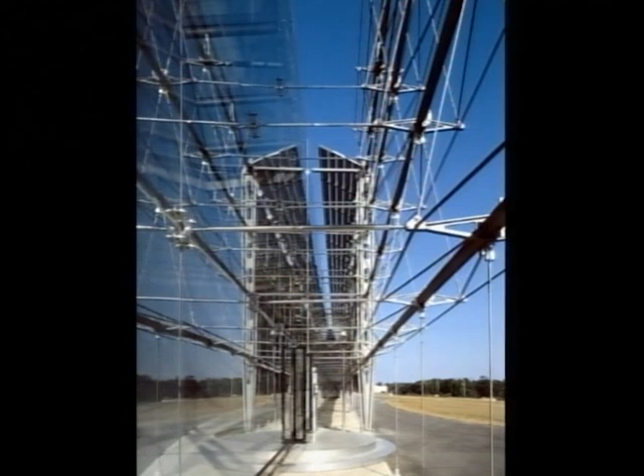At the same time, we created a sort of transition, because this structure is very thin, very little, even if it has 12 meter beams, but it's suspended from the big beams on top with cables to make it horizontal, to stabilize it horizontally.

It's just connected to the glass facade, which is a suspended glass facade, one of the first suspended glass facades, to avoid displacement of the glass facade from the wind.

So this gallery is a transition between the countryside and the office places. But because we wanted people coming from the countryside to not just immediately reach their desk, that's impossible, so you have to have a sort of time of transition.

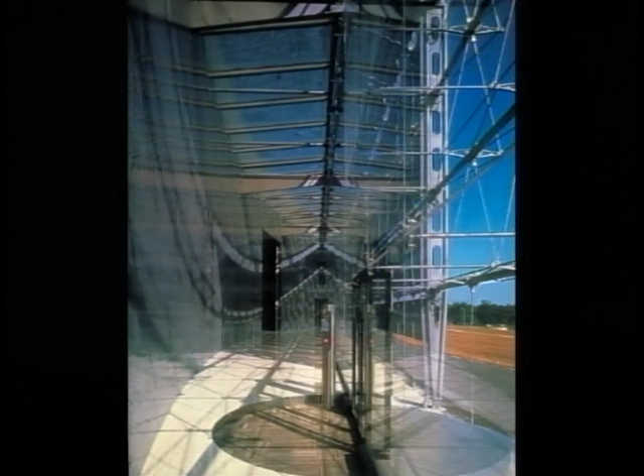And we did a hall, and this hall is not very big. It's only 100 square meters, but it's 50 meters long. And its back wall is a curved wall, from 0 to 4 meters in the middle and back to 0 at the end.

We organized to have the door entrance at one extremity and the door to cross the wall to go to the offices at the other extremity. So when you come into the building, you just open the door, facing the wall.

So you have to turn your body, discover the space, and start to walk. When a visitor comes for the first time into the building, they do just as I described. This is a dynamic space.

For me, it's a dynamic space. It's a space which makes people walk inside, because first they stop, and after they look at it, and after that they walk.

And you go to the end, to this door, to this hole inside the wall, to enter inside the offices building. So this is a sort of outside-inside journey, going to the door at the end.

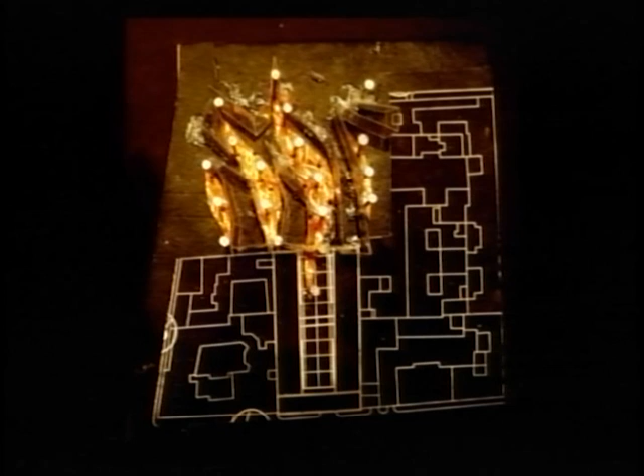Usually we start to work by models. We started by making a little model of the site, and we began by understanding the brief, understanding what it is, how we can deal with this site, how we can deal with the program, how we can deal with the conditions of Rome and this historical city. We start by putting objects on the model of the site to get my mind working, to understand what we can do. So we made a lot of little models like that, like that, like that. This is never the final project, it's just the beginning, just to start making your mind work like that.

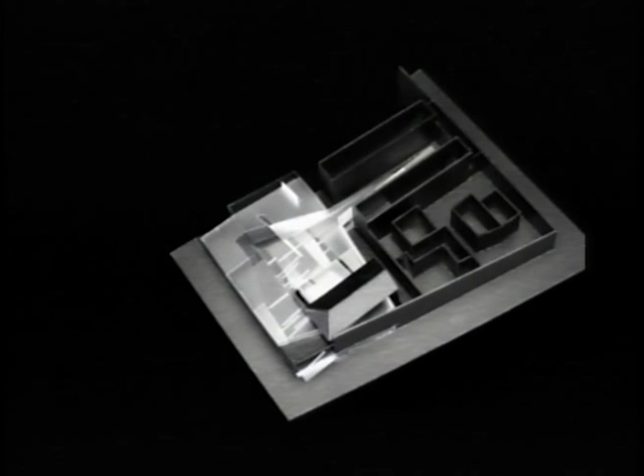And at the end, we arrived at that model for the first phase of the competition. The first decision was to fill the site, to cover all of it, and to have the possibility to keep the facade, because we were asked to keep the facades on both streets, here and here, but we could open the corner to create a new entrance. Between the entrance here on Via Reggio Emilia and the new entrance on Via Nizza, we have 4.5 meters of difference.

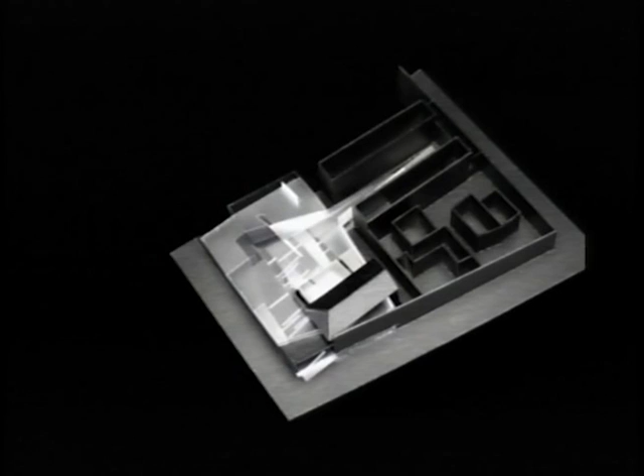So we decided to dig into the ground to create the high volume, because in some parts of the exhibition rooms they asked for 11 meters height. We didn't have that on the site, except by going up above the walls, but I didn't want to go above the facade, because I was thinking, my God, it's Rome, it's really protected and really preserved. If we build something like a tower above, or a building that goes above the walls, we would be pushed out. So I wanted to stay quietly behind the walls, and say, okay, I don't love staying behind the walls, but I keep them, and after that I create a new world.

So it was, again, a sort of strategy. By filling the site, even though they asked us to keep a little garden on the site, we decided to create a sort of hall, not yet shown in this model, to have a little garden after passing under this corner, and to fill that space by creating a sort of roof, a roof that could become something else.

At the first phase, it was like that. After that, I came to the site, because I hadn't come to the site before, having won the first phase and being selected. I know I had to have gone, but I never came, so sometimes you work only on the papers. Because it's open, it's not paid, so you have to do that much more economically.

After that, we started to develop. For the second phase, we started to develop the auditorium, the passerelles, etc., playing with the passerelle to organize the space and to organize the walkway everywhere, how to travel the space. And we came to this project.

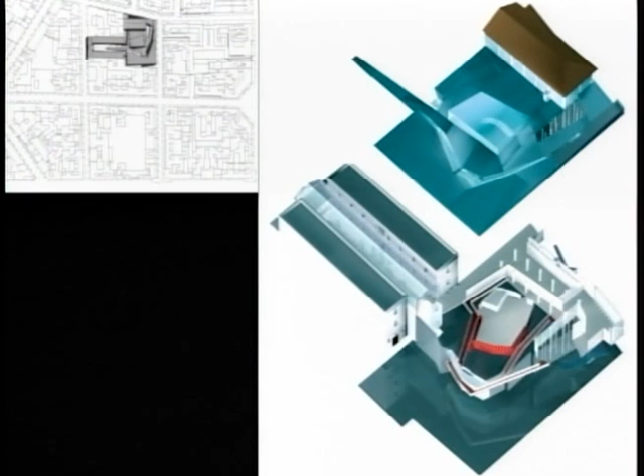And because we are in Rome, for the roof, we said okay, we do a terrace, a public square connected to the city, but at the same time in Rome we need a fountain in the middle, and we need the restaurant in front of the fountain. So we created this volume of glass with water running on it. Sometimes it runs, sometimes it doesn't. At the moment it's quite complicated, still complicated. And the restaurant is established in this old structure, open to the terrace in front of the fountain, as everywhere in Rome.

So finally, this terrace used by the museum was the reference - if I continue like that I'll speak always only on the MACRO. But because I wasn't really familiar with Rome, I remembered that in movies from the 70s, with Sophia Loren and Mastroianni talking on terraces of buildings, on balconies everywhere in Rome - that means the terraces at the top of buildings are used by people as a place for living. So that's why we made this terrace public, because we're not in a private building, and at the same time it became a square for the city.

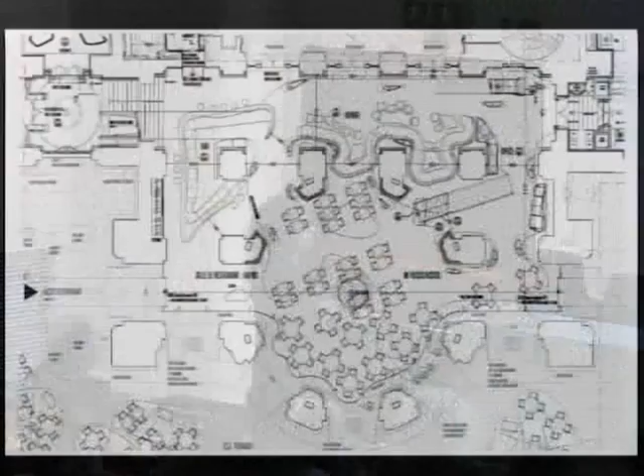And I had to create a second floor inside. So I decided to continue turning and create sinuous lines, to create a mezzanine without touching the walls, turning around the columns, creating a hall, with a staircase in the middle held by two columns without touching them. So everything avoids touching the walls and the cupola.

And this line was negotiated with the Ministry of Culture, with the commission for historical monuments, because they wanted me to keep the center of the cupola visible from below, so that when you enter the restaurant you know you are under a cupola. At the beginning I had this line coming much closer to the facade, and the position of this line was negotiated twice.

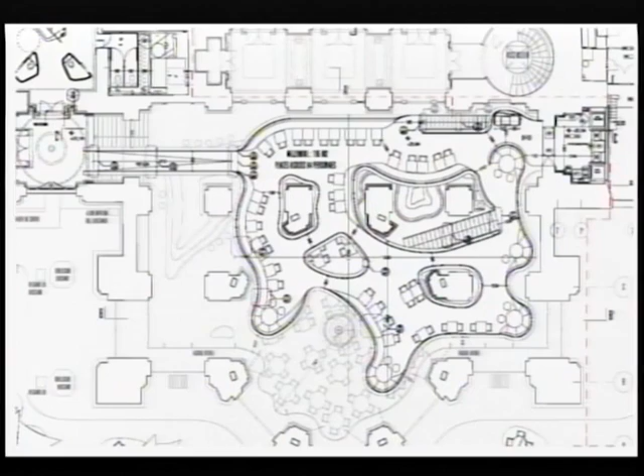So in a way, I didn't design that at the beginning, it's a result of negotiation. But by doing that, we created these balconies, which are very particular inside the restaurant. We passed the National Committee for Historical Monuments, and we had a unanimous vote. They said it's an exemplary project. Oh my God, I became an exemplary architect working in a historical monument. It was not what I was thinking before.

But sometimes history happens that way. The only place where we have a frame is at the door entrances, because the entrances are flat and we have to make them stable, so we need a frame. But it's not touching the walls or the columns, just fitted here and there in between the joints in the stones.

And everywhere else, you see the curved walls, the curved glass sheets, coming up directly to 6 meters high, which is the level of the cornice on the pylons, and going up to the cupola, without anchoring anything into the stone, just a silicone joint at the top, because the glass facade is auto-stable.

And inside, the mezzanine is a steel structure with molded plaster that we shaped around the columns, and we pushed back all the columns close to the other columns to keep the space as open and free as possible, as the cupola was before. And we covered that with plaster, keeping it as thin as possible to have a mineral aspect, like the stones.

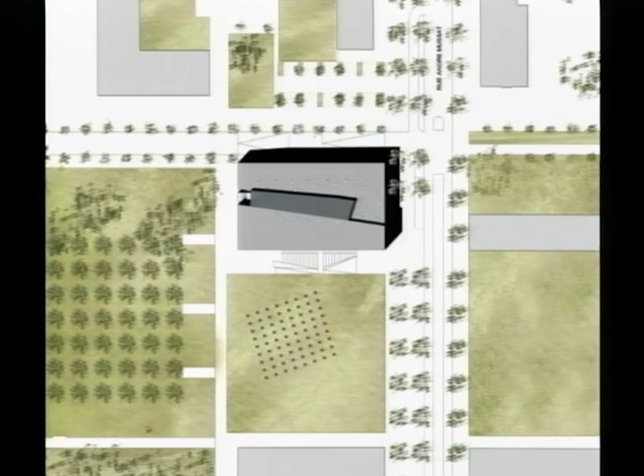We just opened in July the new museum in Rennes for contemporary art. It's in France with a very normal regulation for urban planning, where an architect decides that you have to build on a rectangle, and because you have a certain height to fulfill, at the end you have to build a parallelepiped. So it's a bit sad, but you have to build a parallelepiped.

Because when you fill the brief inside the volume dedicated to the space, you discover that you have no possibility other than doing a parallelepiped. So I was a bit disappointed when I discovered that I have to build a parallelepiped.

So I decided, okay, I built a parallelepiped, but I cut it. I cut it directly with this oblique line from the top to the level below, to the storage, to have a big vertical space 30 meters high from below to the top, where we can, with this narrow, very long space, describe a journey inside the building.

And she said - she knew that the museum would come close to her piece - she said, okay, the museum has to have a silencious facade in front of my piece, because my piece was there before, and you can't light your facade because you can't light my piece.

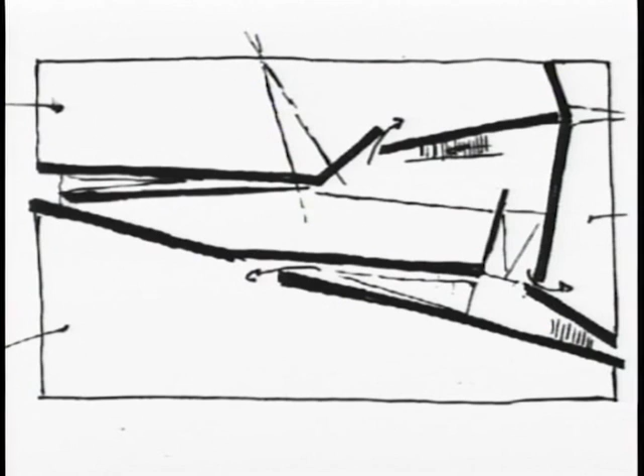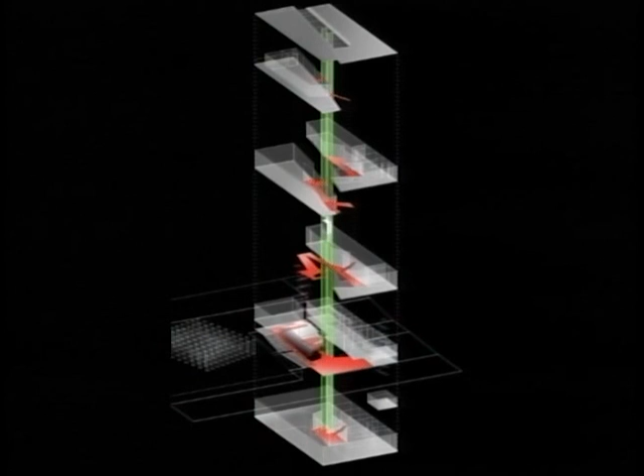And some sketching to try to create the space in the middle by pushing the space to open it up. And having this vertical promenade with the lift, which is a lift for the art pieces and also for people, and the promenade in the middle with ramps and different levels on both sides to create a sort of journey through the building, and a silencious facade, totally black.

But it's not total black. This time the black is outside. So this is the line, which is exactly at the same height as the stones. Here it's stainless steel black with three different blacks, but you don't see it because it depends on the lighting of the sky, and it changes colors all the time.

And this is glass, but every row has a different composition of glass. So it goes from a very opaque, total opaque black to a gray transparent. But from outside, you don't see that during the day. During the day, the facade is perceived as black. But at night, it's something else.

And because it was in the regulation, we had to create this floor set a bit back and have a cover. So we decided to have a flying roof above and to have the glass facade again for the offices on the top.

And this volume is the main exhibition room, 50 meters long and 500 square meters. This is in cantilever above this space, which is a public space, and it's supported by this concrete block, black concrete, which changes color depending on the humidity or not. And the entrance is here, so you don't see anything. From outside, it's a silencious block, a monolith black, as the artist asked.

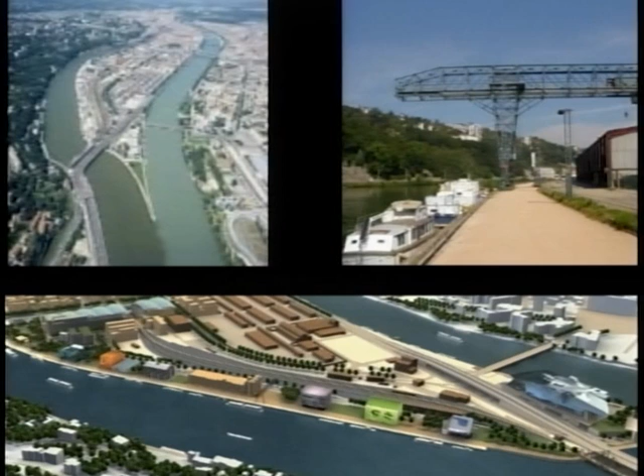We are building at the moment an offices building in Lyon for the headquarters of a big company. This is on Confluence. Confluence is a place in between where the river Rhône and the river Saône connect, and it was the industrial harbor before. The industrial harbor has left, and now they are developing a new area close to the city center, which is here.

And a company which owns this quay, the national company in charge of the rivers, is the owner of the building from the sugar, the building from the customs, and the building from the salt.

And they decided to renovate these buildings and create new buildings. So they did a competition without a program, and I won this one. And just at the end, which is opposite the Confluence Museum, under construction too, we are now building it.

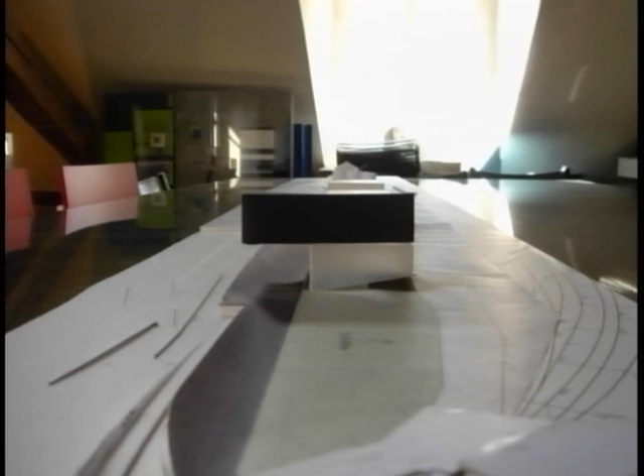So again, my site was a parallelepiped, and I had to build a parallelepiped. I said, okay, I don't want to do it, so this time I didn't cut it. I just twisted the upper part in cantilever toward the river bank, to have a glass box, transparent below with 2 levels, and 4 levels a bit darker above in cantilever.

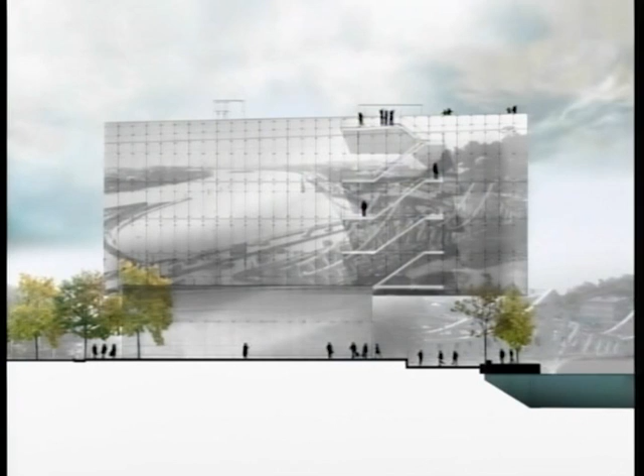So we were asked to work with an artist during the competition, and I worked with Felice Varini, who is a Swiss artist living in Paris. He works on the question of perspectives and points of view. I told him, you can play with my facade, do what you want with it, you can disturb it, change the perception of it. He said, Odile, you never give an order to an artist, I do what I want. I said, okay, do what you want.

So he said, okay, architects are arrogant, and architecture erases the landscape behind it. So I want to rebuild the landscape on your building. But because this is a building, I will take a picture from the top of the building in the 4 directions, and I will reapply on the facade the landscape which is behind, but in black and white.

So we are coming from the north, going to the end of the peninsula, and you see the end of the peninsula, you see the bridge just here. So the landscape is rebuilt on the facade, on the glass facade, in the 4 directions.

But for doing this huge cantilever, which is 25 meters above the river bank, and 4 levels, we had to build a very huge structure. Because we were an industrial harbor, we had these huge cranes and this huge bridge to transfer the goods from the river to the bank. So we built as for these objects.

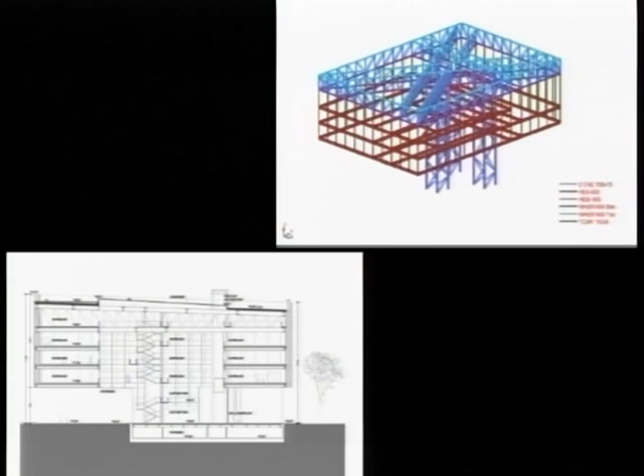That means we built 3 huge pylons inside an atrium to support huge crossing beams in the middle and one on the others, and beams all over the 4th floor, with suspension tubes, very tiny little tubes, to support and hang the floors below.

The space is open, with only some offices enclosed, with the atrium in the middle. You look at these huge columns. One has a staircase, one has a lift, and the other one has 2 lifts. And this is the placement of the facade below.

So that means here we are in the atrium with a roof floor, and you see the bank of the river down below. But when you walk on the river bank, you see through the building too. And this is in cantilever.

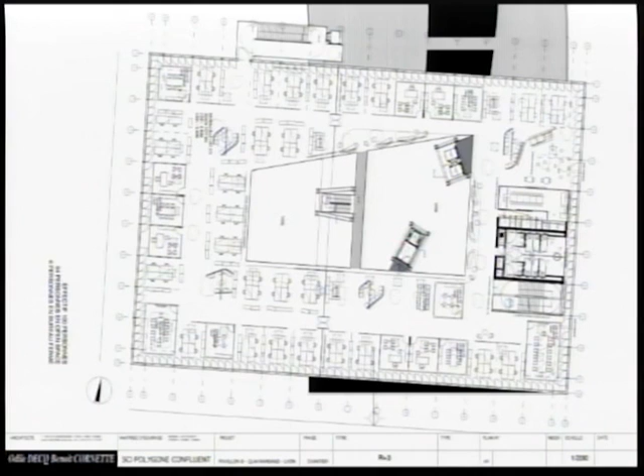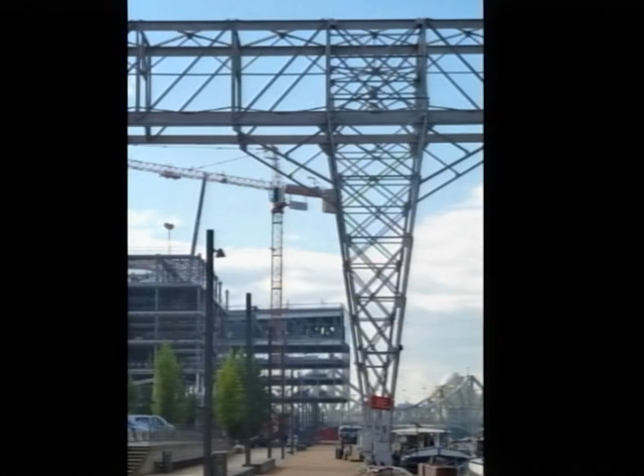So it was 3 or 4 weeks ago, because now the facade is starting. You see these huge objects that we had, that they kept on the side. So my building is going up to the river.

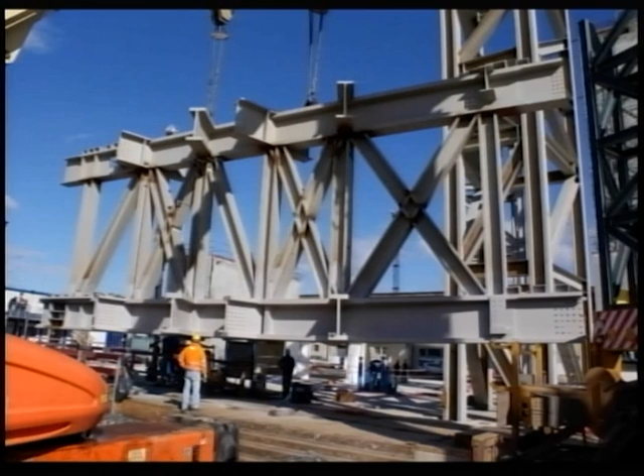So, huge beams. This is 4.5 meters. If you see this man, look at this man and look at this height. This is the 4th floor, in the middle of the 4th floor. And now, for me, it seems very little, but it's huge.

So you see the facade starting to hang on the structure. And inside, the atrium is 28 meters high to the rooftop.

And inside, the client decided that everything has to be transparent. So when we have enclosed offices, we have to have transparent glass partitions. We decided to keep the false floor, because we need that for the cables and connections, but to avoid the false ceiling, using the concrete ceiling slab above to have the warmth of the day coming into the floor, and to refresh it during the night.

But because of that, we have problems of acoustics and lighting, because usually we use the false ceiling for that. So we created with Luceplan new lamps, which are acoustic and lighting at the same time, which we call petals, floating above the office desks.

And they are developed now by Luceplan. Sometimes you have a cafeteria and some offices, and the toilets will be red this time, all red. And the lamps that we developed with Luceplan, and the prototype in their offices.

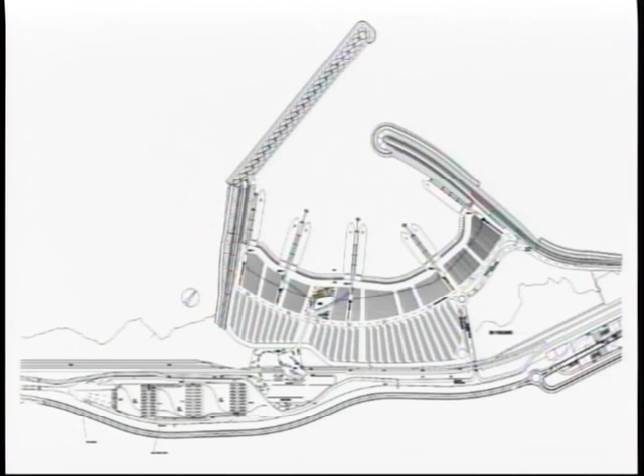At the same time, it's a place where a lot of Africans, Moroccans and others want to cross the Mediterranean, the Strait here, because it's just in front of Gibraltar—only 30 kilometers—and they want to cross to Europe. So we have a lot of safety and security problems. This is a very big condition problem.

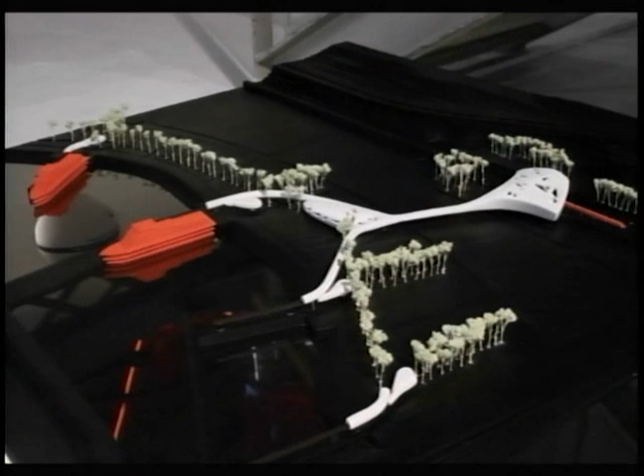So we decided to design this passenger terminal like a sort of animal anchored to the site, with tentacles going to the sea, and to have the waiting room a little closer to the sea, because sometimes when the sea isn't good, you have to wait for hours before crossing. So we had to provide comfortable conditions for people.

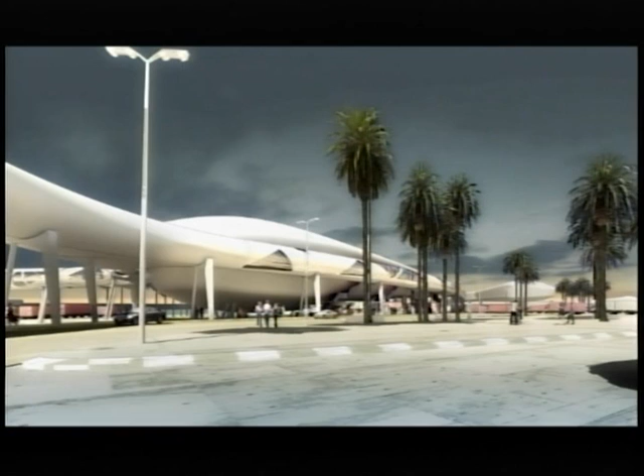Even for those waiting in their cars, that's why we lifted up the lounge. This is the terminal interior, and the lounge. The lounge is like a well, lifted above the ground, with the ground dug underneath to provide shadow for people staying in their cars, so they can go up, find toilets, find drinks, etc.—a little comfort on this surface, sometimes in hot weather.

For the moment we're waiting, because they had problems during the economic crisis in 2009. I'm not sure it will finally be built, because in Morocco you never know. In Italy you never know, but in Morocco it's worse.

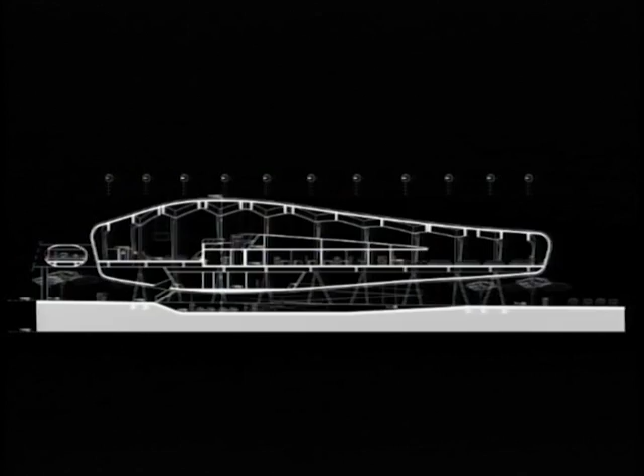In Italy you don't build. When you win, you don't build usually. I was very lucky with my museum. Everybody told me that, so I know that I'm lucky, but not in China.

So this year we won a new museum. It's in Nanjing, where they discovered some years ago one of the oldest bones of humanity, in a cave, in a mountain, at 1 hour of driving from Nanjing. So they decided to develop that as a huge site for this history of humanity, and to build a museum. They did a competition and I won it.

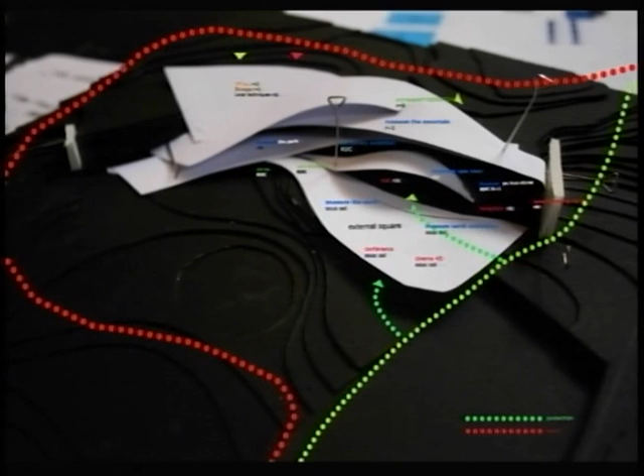We decided, because the site is interesting, that we had to play with the lines of the site. Because these caves were inside the mountains, we decided to play with the mountains and develop the building from them. So we played with the lines of the mountains and the site, lifting, digging, and transforming them, developing surfaces in between these lines, and developing paper models, and after that defining precisely the curved line from the mountains to the museum.

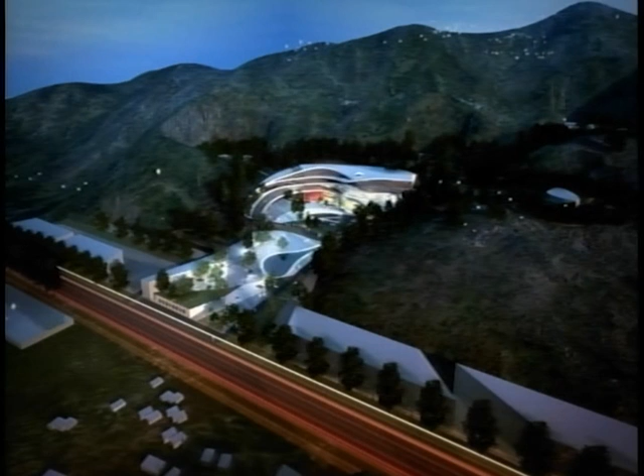Because it's not only a museum - there is a pavilion, an entrance pavilion, there are some shops everywhere, there's a huge car park. They will have some sites around for explaining different things, and hotels, etc. At the end it's very commercial, but also very cultural.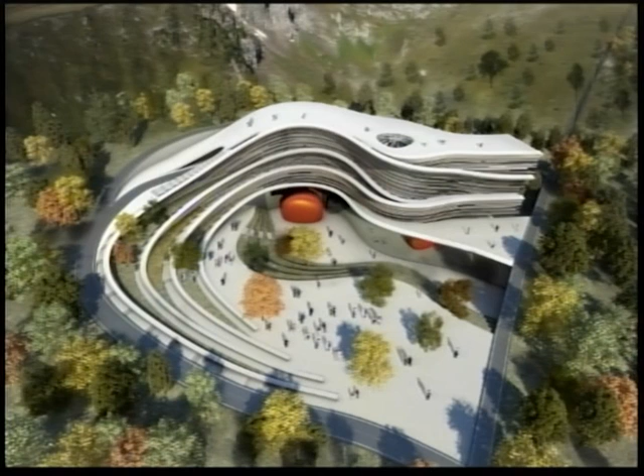So this is one of the more recent images that we developed, because we are at the phase where they will start to dig in January - we won in February this year. They will dig next year, because they want the building for 2014. So it's another way of perceiving time in China.

And because we are in the mountains, I wanted to build it with the curve, as I said. They said they don't want a total glass facade, so we proposed a sort of screen with stones in front of the glass facade, to give people the possibility to travel everywhere outside and inside in the same ways.

But there is a main vertical circulation in that place, and these two levels - this high level of ground floor and the mezzanine - are for commercial use.

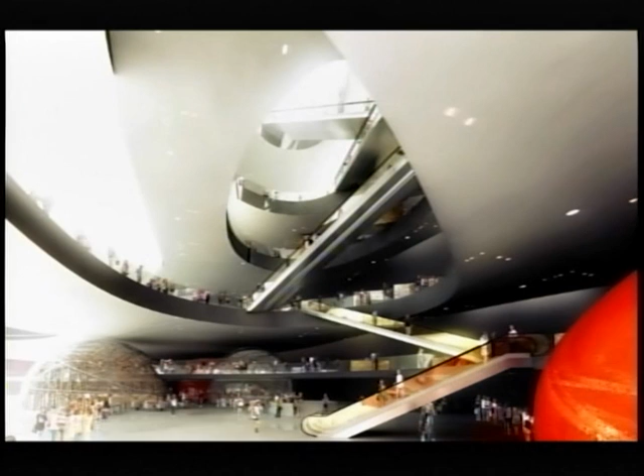With millions of people expected to come inside this museum, we need escalators - we can't have only staircases and ramps, it's not enough. So we played with the escalators, and with the holes of this atrium, the vertical hole, displacing it on every level, to play with how people travel the space and discover it on both sides in different manners, and sometimes by staircase.

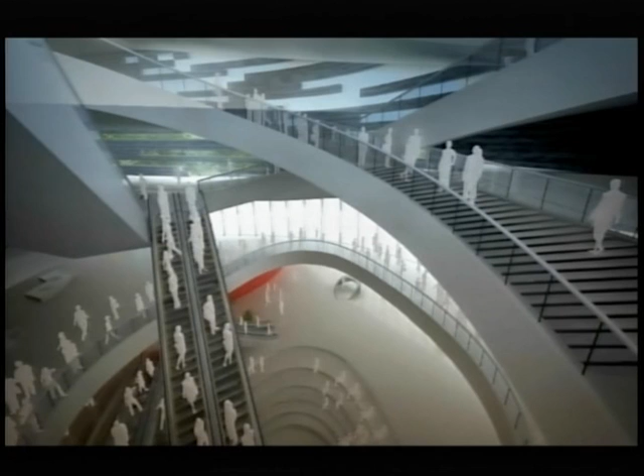For the exhibition, we proposed some exhibition sets for the different exhibitions they needed. But finally they decided to appoint an American company for doing that, so I will start to discuss with them next month.

Some years ago we did a building in Shanghai, a very little one, and a client asked me to come to a jury in the center of China for a tower. I answered yes, and as soon as I did, they asked, do you want to come with a project? I said yes, but for what? They said for a pavilion. I said yes, but can you send me the site? They sent me an A0 sheet of paper, white, nothing on it except a little blue pond somewhere, and said, this is your site.

I said, okay, but what is this sheet for? This is for developing project buildings for exhibiting furniture. Okay, 4 hectares, and I have the little pond in the middle for a 1,500 square meter building, so a very little one. So I came there.

I arrived with one project, because it was only 2 weeks later. I said, okay, I propose you that. They asked, do you have others? I said no, I came with only one. They said, okay, we will build it. So I was only allowed to come 3 times. I knew beforehand about that condition, that I couldn't come so often and they wouldn't pay for my travels, so I had to do something a little bit simple but complex.

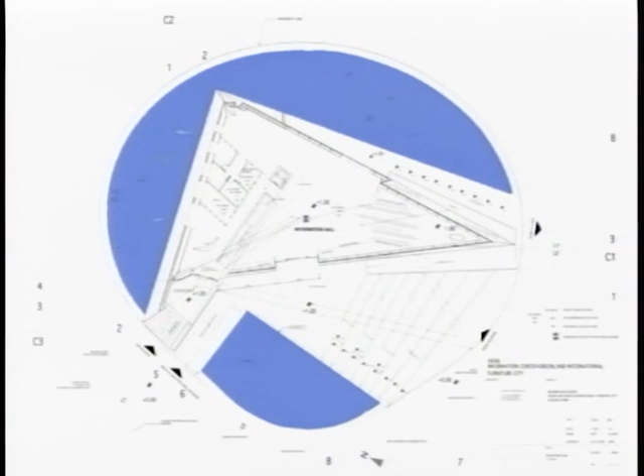So I proposed on my pond to build a sort of pyramid pavilion, because my pond was not large enough. It was not 1,500 square meters, much less than that. So I had to go down and to go up. I could have gone to 20 meters high. So I decided to do this and propose that building.

And I went 3 times, 1 week each, discussing with the engineers and the architects, exchanging a lot by emails, coming there to go to the supermarket of materials, huge, enormous, a huge site of supermarkets choosing the materials, choosing the floors, choosing the materials of the facade, the glass, etc., in huge supermarkets or shopping malls of materials.

And at the end, they sent me the pictures. It was 14 months later, after my first email, and it was exactly what I designed. So it's possible, not always, but this one. But the structure was a bit complex because when I received the first plans from the engineers, the beams were going out everywhere, etc. So finally I said, okay, I developed that for you and you let me do it.

We are doing offices in Paris in a very particular condition again. This is a huge warehouse, 400 meters long, built in the 60s, that the city of Paris bought, and asked Rem Koolhaas to do a master plan to develop it, because this storage, this warehouse, had been built with the possibility to build 6 floors above it.

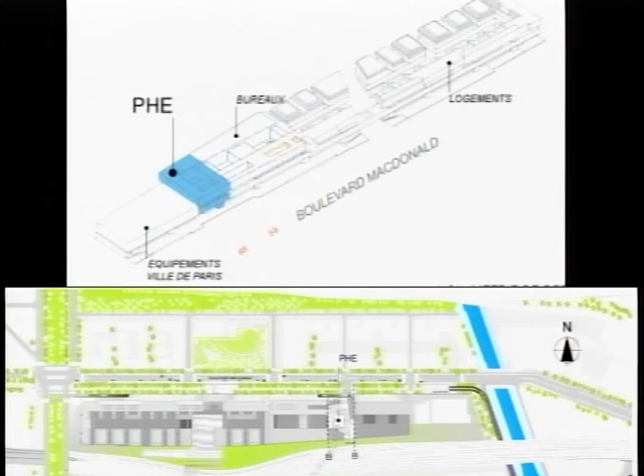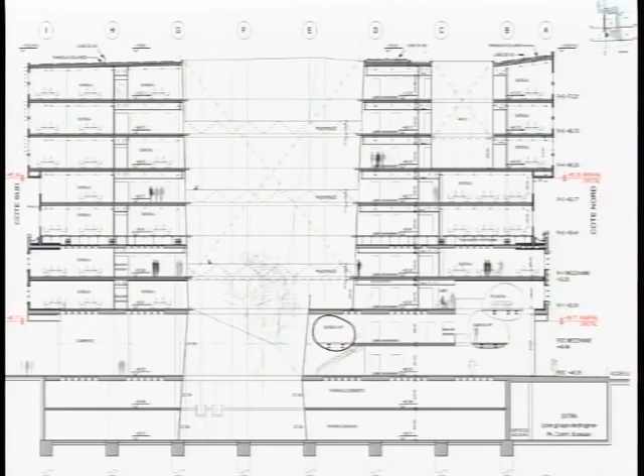But okay, because mine was for an incubator of new startup companies, I was thinking, this is not an offices building, I can do what I want. So I proposed a huge building, with the car park and the commercial center, and I'm the only one who is going down to the ground floor. The other residential buildings stay above the commercial center. I'm the only one going down, and 6 floors above: 1, 2, 3, 4, up to the top.

And a huge atrium, because there is a sort of courtyard for the car park, with a lift and escalators to go up to a sort of passage crossing the building.

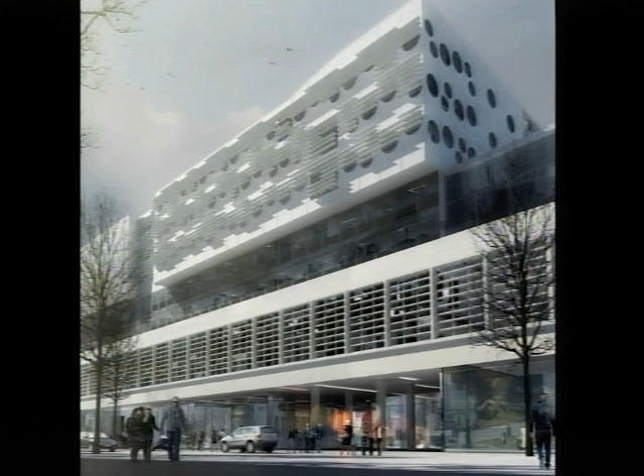So it's very complex. And I proposed to have bubbles on the facade, because Rem Koolhaas gave a regulation. This is the facade of the old warehouse. We have to have crystal, mineral, crystal, mineral. What does that mean? I don't know. But okay, so every architect interpreted that. So I was thinking, okay, I do crystal, my facade, the entrance facade, is in glass.

The old facade is in concrete, so it's mineral. Again, glass, because it's crystal. And above, what can I do? I was thinking I will not do stone, because I have to build in a steel structure, so I have to build very light. And I decided to have these ceramic panels on the facade, and to create bubbles and protect that with solar screens.

But at the same time, the client, the company which will rent the spaces for the startup, said this is not an offices facade. I said no, this is not for offices, this is for an incubator of startups, and they are for multimedia, so they can play with bubbles. What do they call it? IDs or something like that, because we sometimes have to find ideas to describe what you want to propose.

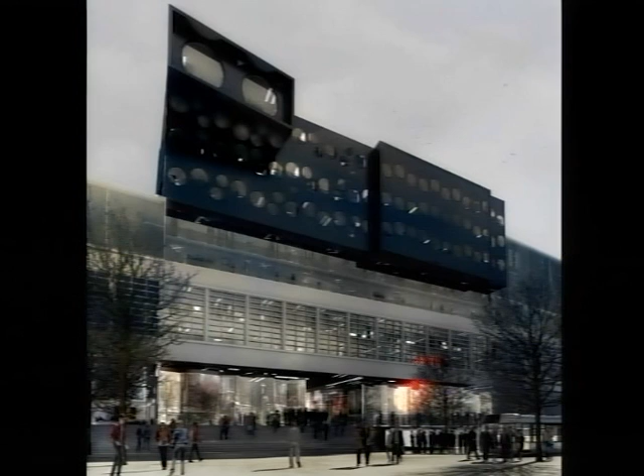And I decided that it could be white on the south facade and black on the north facade. And in between, on the east facade, it's becoming black to white and white to black. It took one year to convince the future user, the company that runs the space, to do these bubbles. But the city helped me with that. Now we are developing it, and we will start to build next year. But it's a very complicated thing.

Some years ago, we did another steel building in a very strange site. It doesn't look very well like that, but it's a steel building, all built in steel. That means the structure is in steel, the facade is in steel, the floors are in steel, the partitions are in steel. Because we are in a steel company, we are in Arcelor, which is now Mittal, one of the branches. This is in a huge site, in the middle of a huge site, with huge buildings one kilometer long, colored with that sort of facade around me.

And I have to do a very little tiny one for offices, that means 700 square meters, very little one. I proposed to build in steel, and they said, are you sure you want to build in steel? You don't want to build in concrete? I said, but you are the company for steel, I can build in steel. But at the beginning, they didn't trust me.

So finally we did it, because the facades are specific panels that are structural and can support the floor in the middle and support the floor on the roof. These are particular folded panels which are articulated all together, connected all together, and strong enough to support the floors. They were developing that panel, so I said, okay, we can build with that.

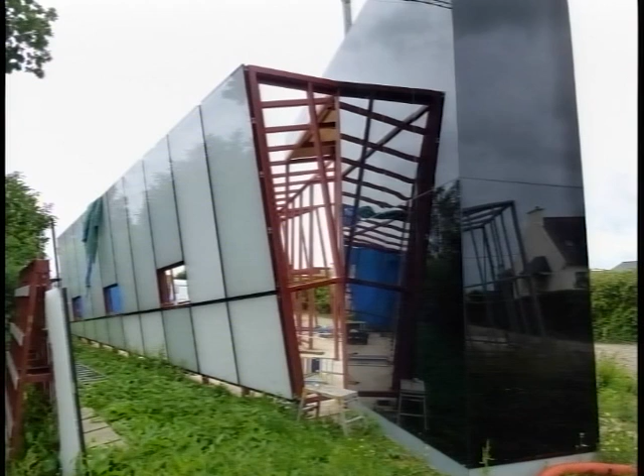Oh my God, what is written?

In front of my building in Lyon, I was asked to develop a project for a restaurant on the river, a floating restaurant. So I decided to do bubbles, because the river has bubbles, and to propose the restaurant as a collection of bubbles, one for the entrance, toilets, kitchen, lounge, restaurant, and cafe. The kitchen is like a kitchen tool.

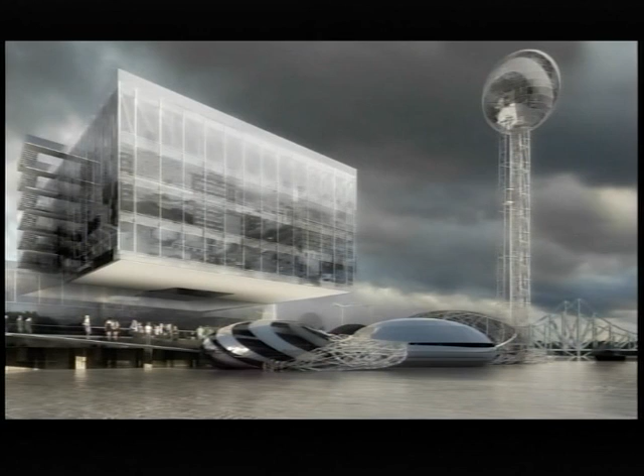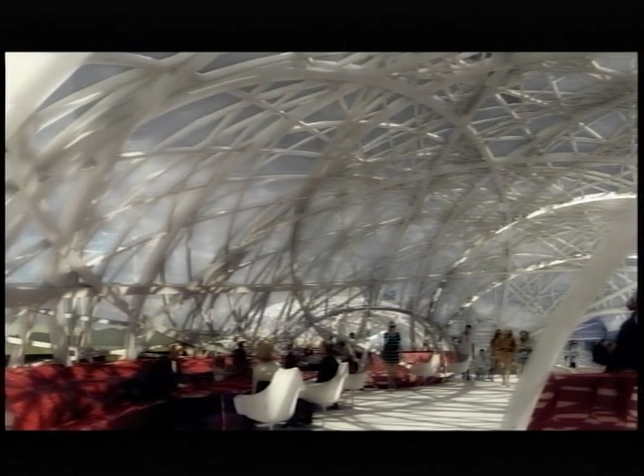The lounge is more funny, with a terrace in front of it shaped like a basket. The restaurant is in another basket on the other side, and then the cafe. My client in the building said, I will build it after finishing the building. So I hope, but I'm not sure.

The company from the river in Lyon that I talked to you about asked me to develop a project in Paris, a floating object on the river Seine. It was a competition site near the Grand Palais, Invalides, Champs-Élysées. It's a very little object, 1,200 square meters, with a hotel, some rooms, a restaurant, and an events place. But 2 programs that they asked to be split, each of them 600 square meters.

If you refer to the first anisotropy image I showed you at the beginning, the Homeostasie installation, I don't like symmetry, I like dissymmetry. So I wanted to create dissymmetrical objects with my 600 square meters each. I found that physicists describing the place where the universe falls into a black hole describe it like that, a sort of schematic idea. The distortion of the space and the surface itself is called an anisotropy. So I said, okay, we will build an anisotropy.

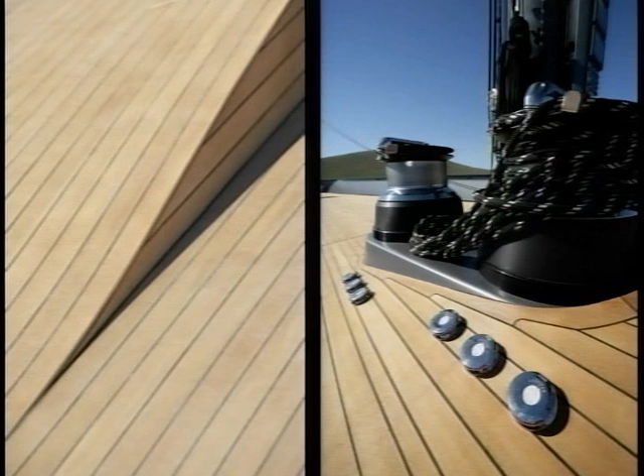And we had to have windows, and I didn't want to have the framed windows that you usually have on the deck. So I proposed a sheet of black glass on both sides, different pieces of black glass, to protect from the sun and allow natural light to come down on both sides of the space below. By having artificial light in the ceiling along this black glass, in the evening the light comes up at the same place to light the deck itself.

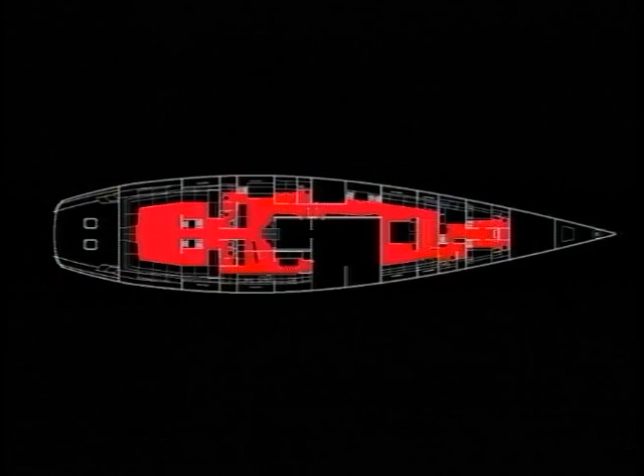You have only a little corridor along the engine rooms. The kitchen has a sliding partition which goes inside this partition. There's a cabin here that you can't really describe because the partition is inside there. Another cabin here, with a partition here and here, but everything is continuous space, the same space, etc., and a bathroom, etc.

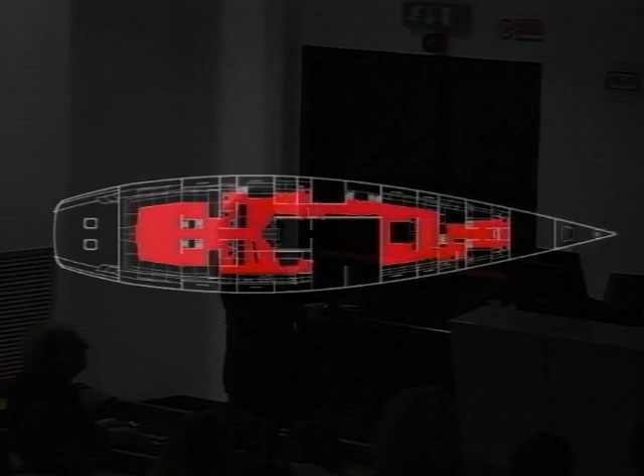The corridor area has shelves for music and books. In the middle of the space, under the salon we have underneath, there are steps to go up, the kitchen, and you see that the bar is cut in the middle because you can slide the partition to separate the kitchen from the other part of the space.

And the master bedroom with the bed that we designed, with all the cupboards on both sides of the space, everywhere, and you don't have any furniture. You are free inside this space. The bathroom at the back is limited by a mirror partition that gives the impression the space is bigger. When you go to the bathroom, you discover you can take a shower with a perforated floor and the shower fixture in the ceiling on this side.

That means the shower is the whole bathroom. But if you want to take a bath, you lift up the floor and you have the bathtub inside the floor. So all the bathroom is a bathtub. And we designed the basin that seems to be double because of the mirror wall and everything.

Ten years ago, we did furniture for the UNESCO headquarters. So I'll do that now without explaining much—furniture, I always have to finish like that. Furniture for UNESCO with seats, etc., a table, paper basket, ashtray. Furniture for a gallery, which opens like that and like that.

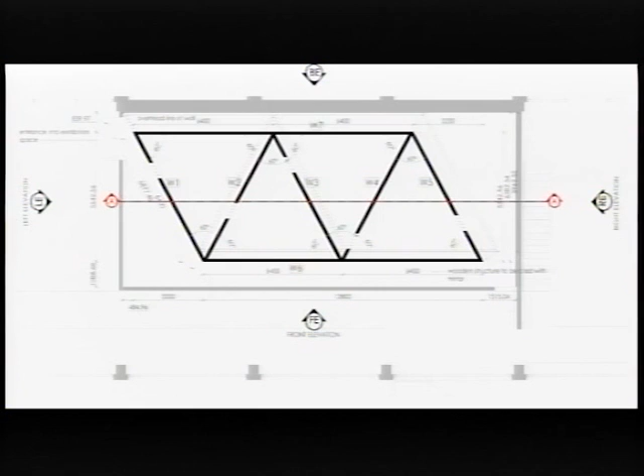And at SCI-Arc in Los Angeles last year, we did an installation in their art space where we built that form, that space—4 spaces, triangular, with doors at different positions, inclined in different positions because no wall is vertical, they are all inclined, and covered in mirror. At the end, when you look at the space, you don't understand how it is. Everything is reflecting, everything is abstract, you don't know where the floor is, you don't know where the walls start—the space is different. And I love to play with this ambiguity of perception of space.

That's all. Just in time.